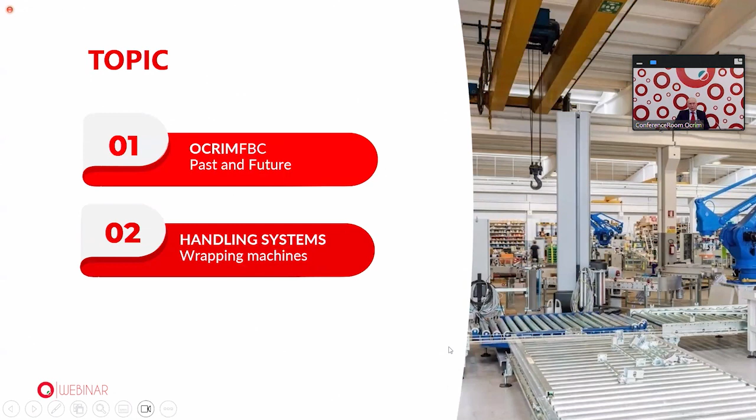We also had a similar webinar two years ago, so this is a continuation. Two years ago we had the webinar to introduce, or to present, the story, and I'll be back to the story in a second, just giving you the key highlights of what happened in OCRIM.

Today we will be focusing on the new products and the developments of the new machines. We will be talking about wrapping machines, or wrappers. So this is why the title of the meeting today is Wrapping the Future — what we will be doing in the future.

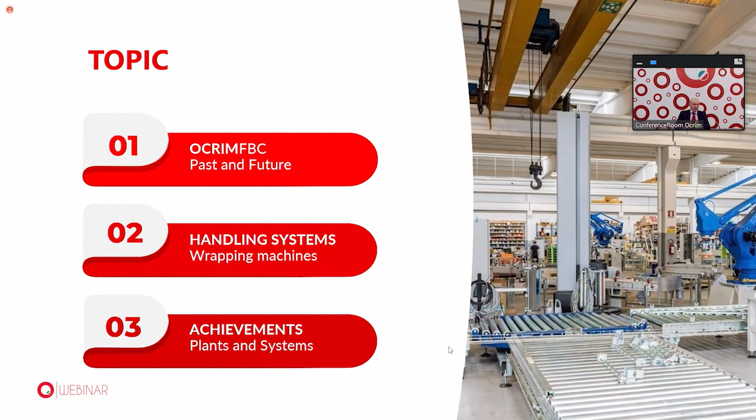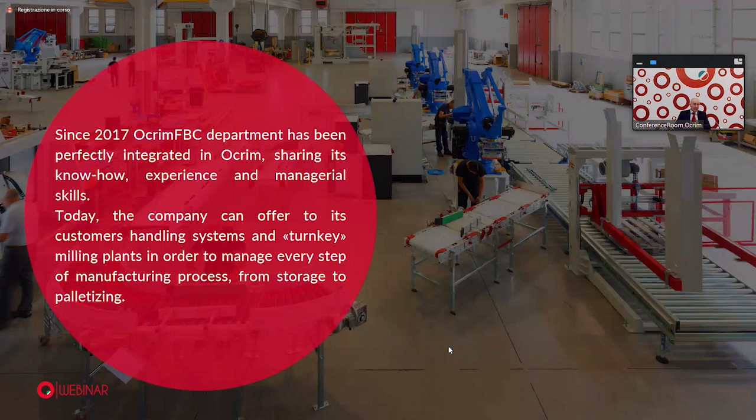A couple of words on the previous webinar and the handling systems, or end-of-the-line sector, in OCRIM. You know that we work in the milling industry, but back in 2017 we took over another organization, very close to our headquarters in our city, Cremona.

That company was in operation for many years. It was incorporated back in the 1980s, so 40 years of know-how and top technical skills.

Their customer package and installation base was a very big one in terms of the number of installations, more than 1,000, but also in terms of having global coverage of their business.

This know-how has been, if you will, imported into OCRIM, and it was integrated with the new technologies and new design systems that we have here.

So we have created a new format on the machines. Machines have been industrialized — they've been, let's say, modernized.

We have updated them with new applications, new components, new mechanical components, new logics, and in general new automation.

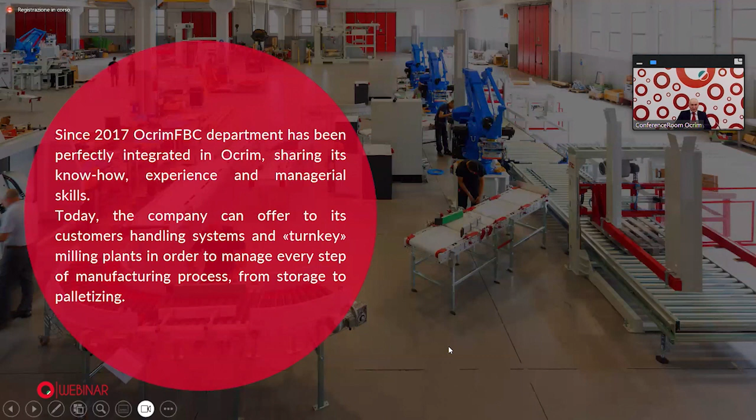Of course, the final product and also the services that we offer our customers have taken advantage of all of these steps forward. Now, OCRIM is in the milling industry, but at the same time we've been able, if you will, to do something very special.

We can now ship our machines to many different types of companies, not just the milling industry. So this is what handling systems do — basically they handle the so-called primary and secondary packaging.

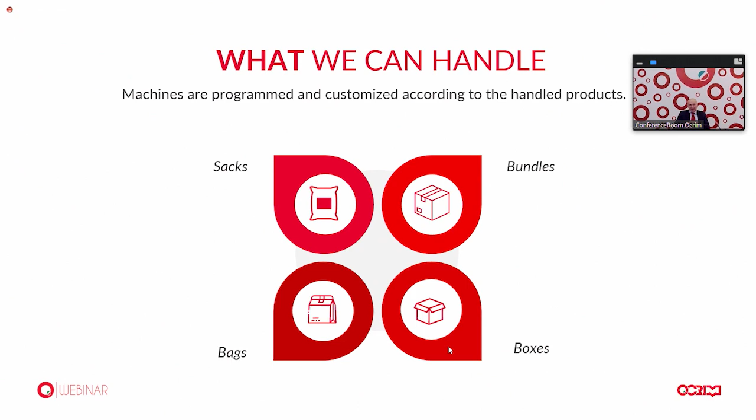The primary action means putting the product into the bag, the sack, the bundle, or the box. The secondary level means handling the sacks, the bundles, the boxes, or the bags. So this is one of the steps of the packaging systems, including wrapping.

So we not only put flour into a bag, so to say, but we also work in completely different sectors. In some cases they're very similar; in other cases they're completely different — for example salt, sugar.

Nutraceuticals, fertilizers, organic fertilizers, chemical fertilizers, cement, concrete, plastic materials.

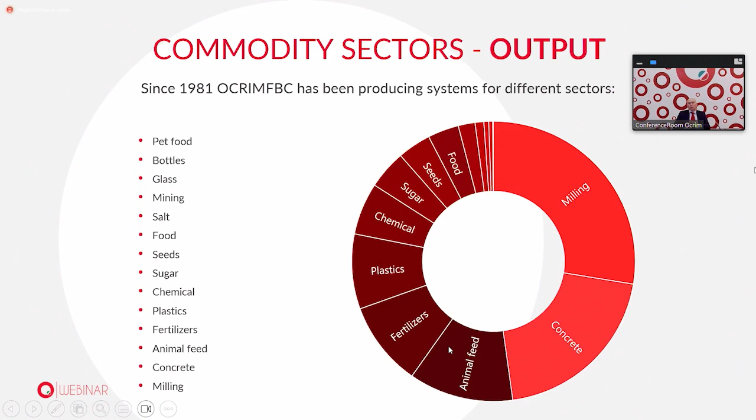Chemical products again. So basically, all in all, what can be packaged or put inside a bag or a box, or even a very general system — for example a bin, a tank, a bundle, or many types of containers.

So what is very special here in OCRIM is that we have become a global company.

Of course we export our machines in Europe, because this is the continent we belong to, but we are shipping our machines all over the world, in the five continents, with quite a large number of applications and installations.

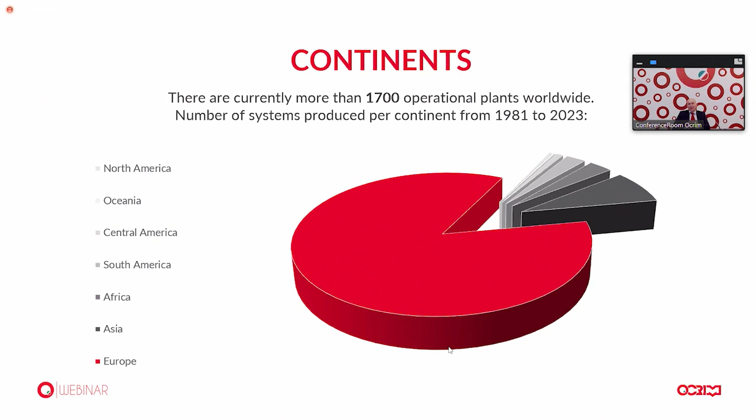As of today, OCRIM has installed 1,700 lines or machines around the world. This is why we are one of the biggest global players in terms of end-of-line handling systems, bagging systems, palletizers.

Wrappers, all of the lines or, let's say, transport systems. Of course we deal with, or we handle, pallets, both empty and full.

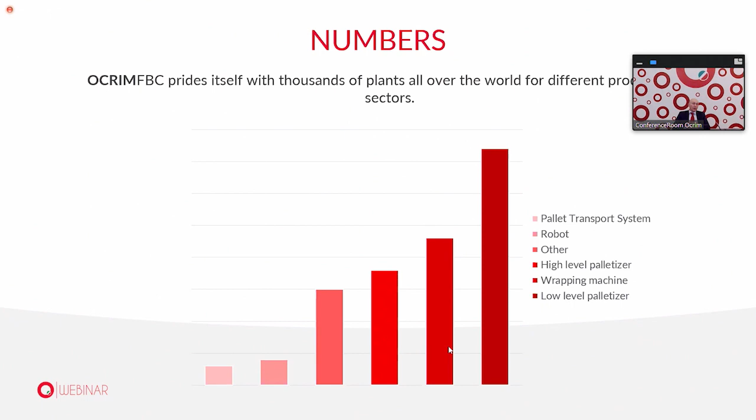As far as the palletizers are concerned, we have the traditional ones, which are basically mechanical. We also have the anthropomorphic robots, and another category, the so-called combined machines.

Anthropomorphic robots put to the service of the machine so as to guarantee all the benefits from every single machine. Together they are able to generate further positive aspects.

For example, a much better or higher flexibility, installation, easy configuration.

Considering different types of layouts and or plans. In many cases there's not enough room or space, so of course we create unique systems.

There may be pillars, there may be other machines around our line. So once again, our machines are very flexible, really unique, and custom made.

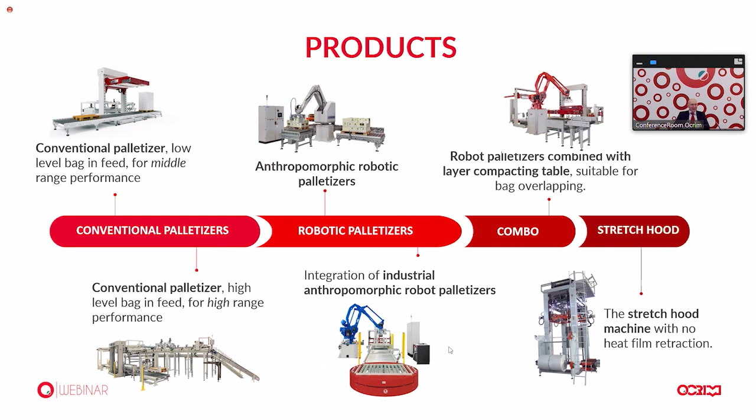Okay, we don't have much time today, so we have so many things to do, but I don't want to lose control of my flow of speech.

Back to our products, we have conventional palletizers. In this case, you have two different types of loading or feeding, from the top or from the bottom. The first line is up to 700, maybe 800 bags per hour. Then we have a second type of machine, from 800 up to 2,500 bags or sacks an hour. This means we can cover a production range which is typically what the market wants in this industry, as I specified before.

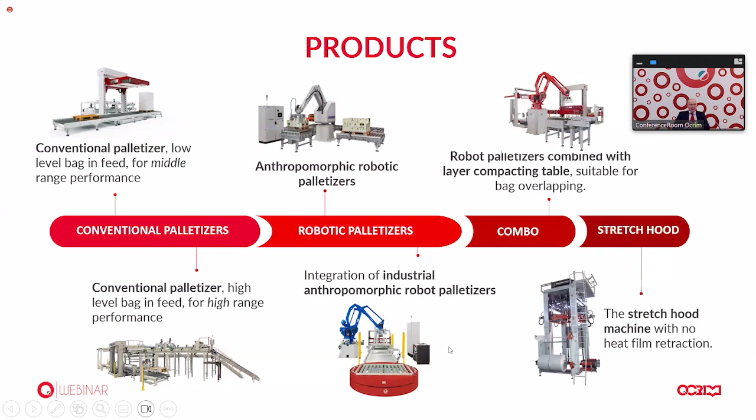Now, this kind of classification describes exactly the topic today. So the AV555, this is the wrapper that we have recently introduced. AV555, that you can see in this slide, is the fruit of our design. By the way, this is the rotating arm wrapper, okay?

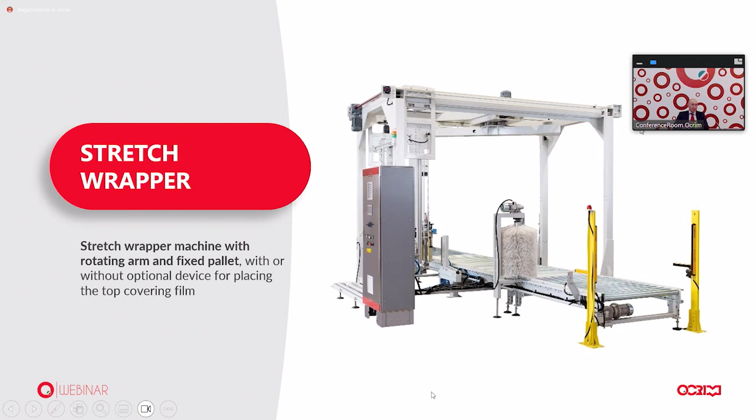As you can see, this is the model where the pallet gets onto the conveyor. There's a rotating arm turning around the pallet, applying the stretch plastic film. We have plenty of options here. The main option, if you will, is the top device. This is basically an arm that puts a sheet or a film of plastics on top of the pallet. And this is exactly AV555.

In this case, the table is rotating, the arm is fixed. I mean, the only movement we have is up and down, the vertical movement. But in this case, the pallet rotates in order to be wrapped. So again,

AV555, if you will, is an evolution of the previous product. This is not replacing the previous one. In the past, we had the AV500. And what was special is that it was a simple, easy machine, one of the best performers, with the traditional film application or wrapping. Today, the market has changed.

What we need is the pre-stretch machine. Pre-stretch means that our machines can save you a lot of plastic material. Thanks to the green philosophy we all want to stick to today, it's very important to consider this trend. So we decided not to waste time, and we have created a model which is really unique on the market.

AV555 doesn't require you to replace gears or pulleys to change the pre-stretch ratio based on the features that you want to use, or even the levels of pre-stretching that you want. In this very case, with AV555, we have equipped the machine with two motors. The two motors work independently. So once again, they can be programmed, set up, and controlled individually.

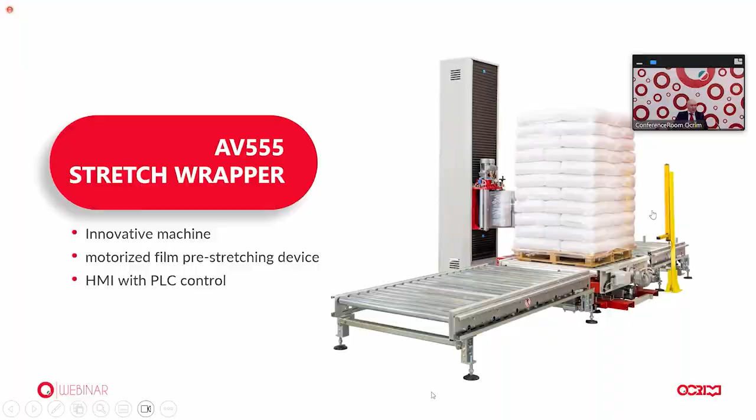Now, to make sure you understand exactly what I'm talking about, we have prepared this video. This is one of our recent machines, and this is what happens soon after the palletizer.

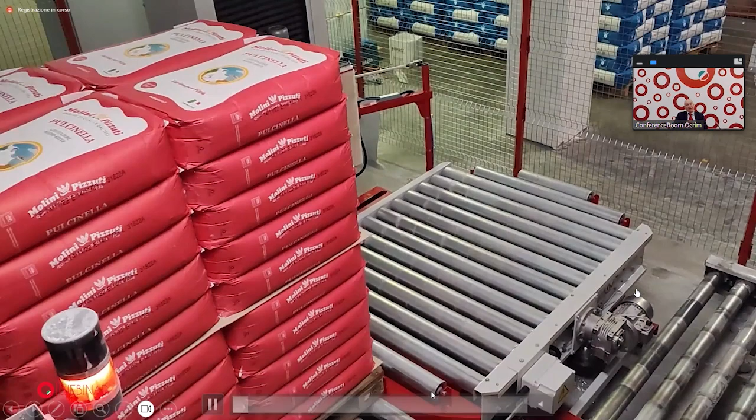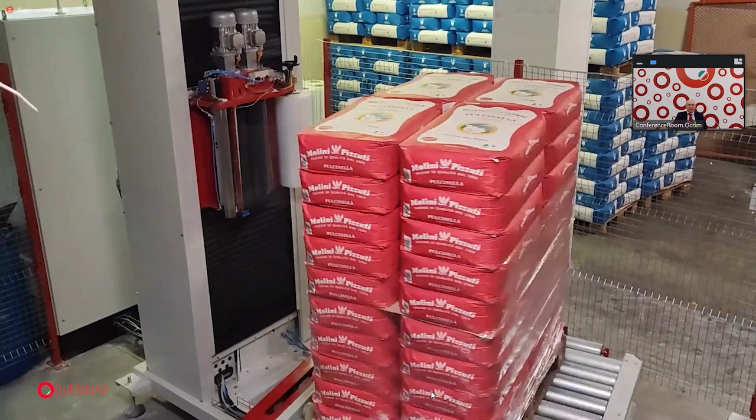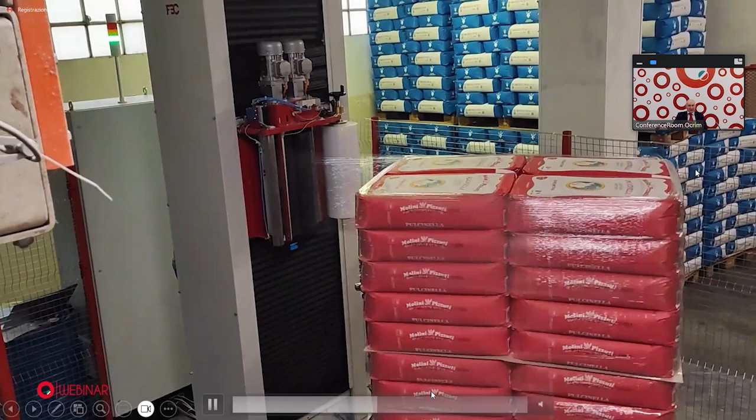You can see here the pallet gets into the wrapping machine, and here's the wrapping cycle. I'm speeding up the cycle to save you time, but this is what you really have to focus on: the pallet is very stable. The wrapping cycle on average takes 1 minute 45 seconds up to 2 minutes, so production is between 30 to 35 pallets an hour.

It is also possible to select how many revolutions you want around the pallet, whether on the bottom, in the middle, or all the way up to the top. From the operator dashboard, in a very easy way, you can also change the frequency of the up and down vertical movement, so you can basically control the speed.

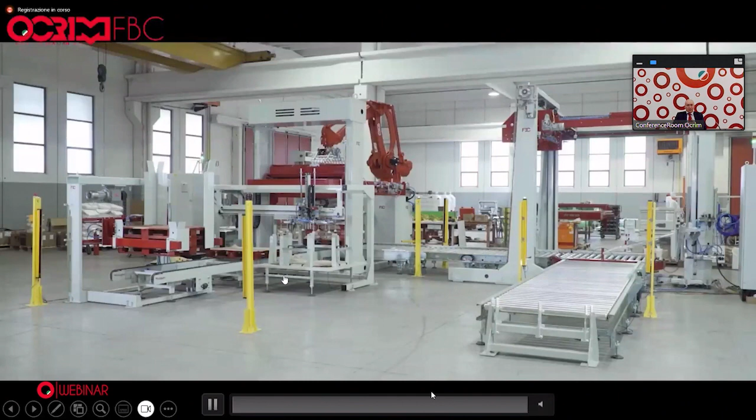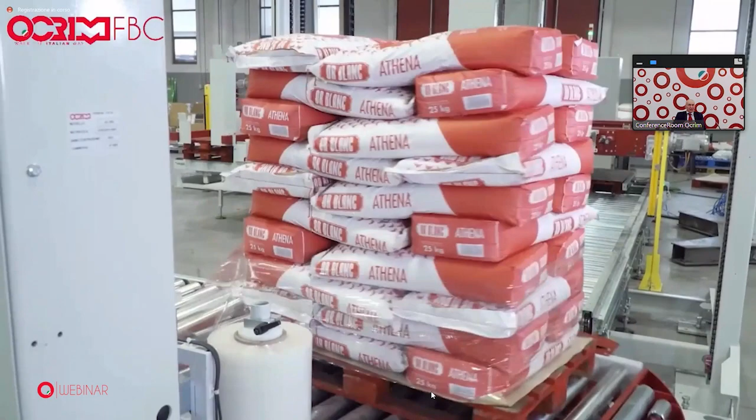This is a different video we have prepared just to make sure you understand that the pallet comes from another machine and gets into the wrapper. This is the AV500 model with no pre-stretch, but the basic operation is the same: the pallet rotates on the bottom while being wrapped.

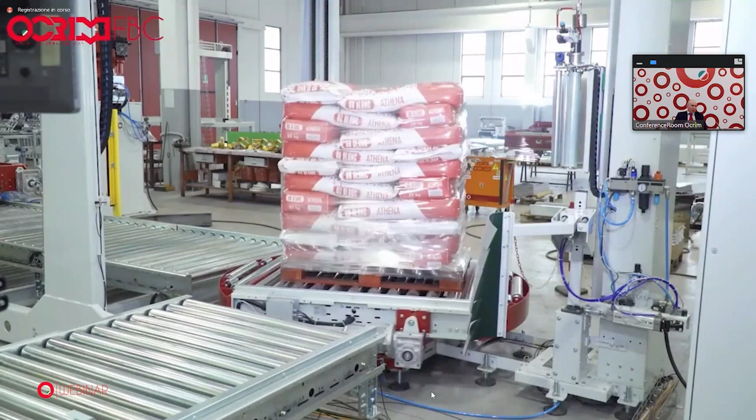Why do we have to wrap pallets? Well, this is one of the key needs of the market, especially in the milling industry. If you want to store your bags in racks, or in an indoor storage area, or even outdoor storage facilities, more and more customers want to make sure their pallets are protected against powder, dust, humidity, or water.

So in this case, you can see that we put another final sheet or film on the top of the pallet, this sort of roof, and then once again we continue with the wrapping. This is absolutely waterproof protection.

The second reason why customers want wrappers is to ensure stability of the load. For example, if you have sacks or bags, or when the filling level is not exceptional, with no wrapping you wouldn't be sure about the stability of the layers. So you may have damages, and it may be difficult to load half a pallet onto your truck.

So once again, this is now ready to be loaded on a truck, and then you can drive for thousands of kilometers or miles. When you reach the customer's premises, the pallet conditions won't have changed, so there will be no damage.

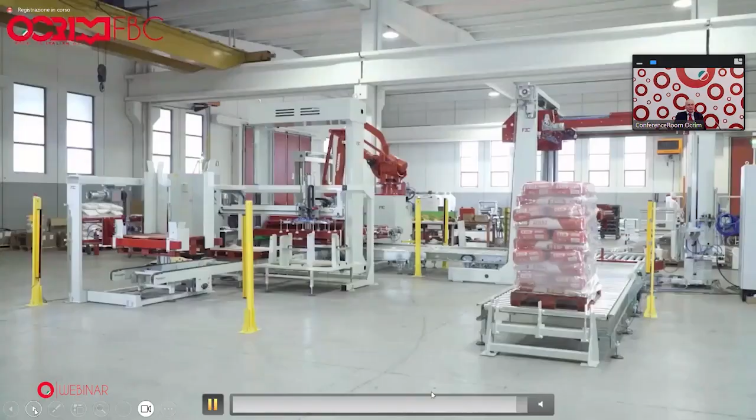We also have other options or accessories you can install on the machine. Let me take advantage of having you here: we have the new Meti Top. This is basically a side arm that replaces the previous model you've seen before in the video. This new model is smaller, so the footprint is smaller.

It is modular, meaning in terms of positioning you can work either on the right or on the left. This can come with the wrapper, but also with many other machines, for example the palletizers.

You can also put a layer of plastic, a film, on every single layer. We have already made hundreds of these machines, which is now very successful, both the Meti Top for the top cover plastic film, and also to include film between the different layers.

Now, we pinch and pick up the film mechanically, then we take it up to the cutting level. Then we have a blade, a very simple cutter, so this is very cheap. This is not very demanding in terms of finding spare parts, so it's a very ordinary mechanical component.

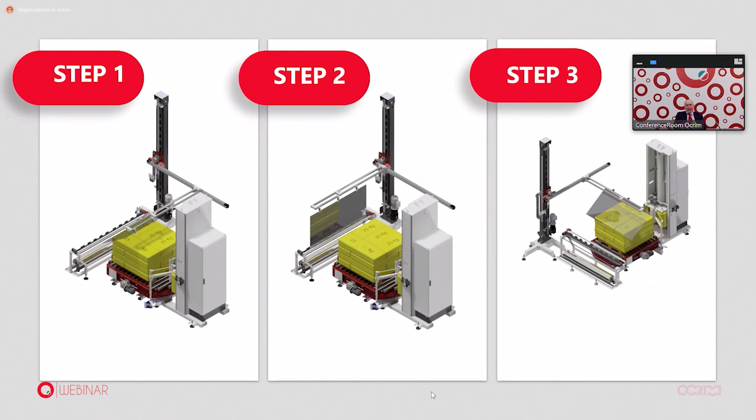It depends on the pallet type, Euro pallet or APAL, 80, 120, 100, 120. You can set a specific operating profile considering every single type of pallet, so the operator doesn't have to change anything for every single pallet. So once again, the changeover time is basically zero, saving plenty of time during setup.

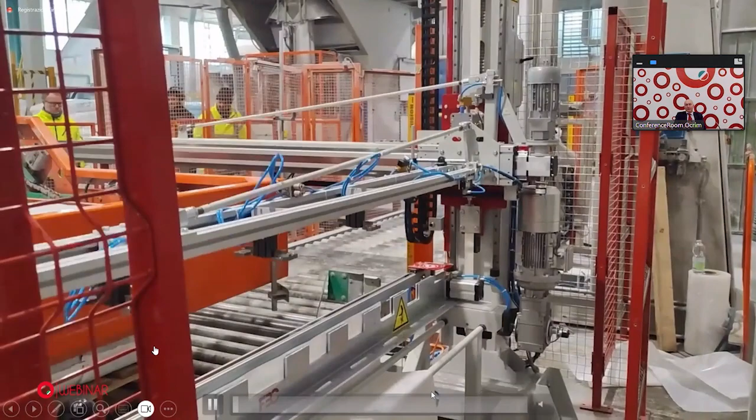This is the new Meti Top, for the top layer. It comes with a palletizer, but the operating principle doesn't change. So we take the film, lift it up, and this is the final phase: we put the plastic sheet on the top of the pallet. You can also put a film on top of every single layer.

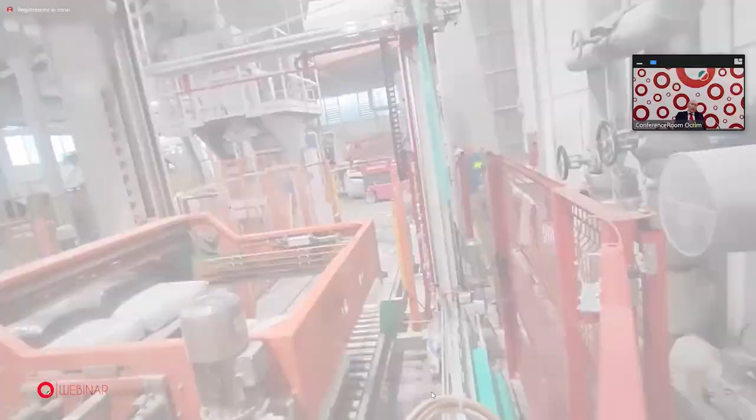This is a traditional or conventional palletizer that I have explained before. Based on how many films or sheets we want to put, you just have to dial the number of sheets and the level, so the height. The machine is absolutely very flexible.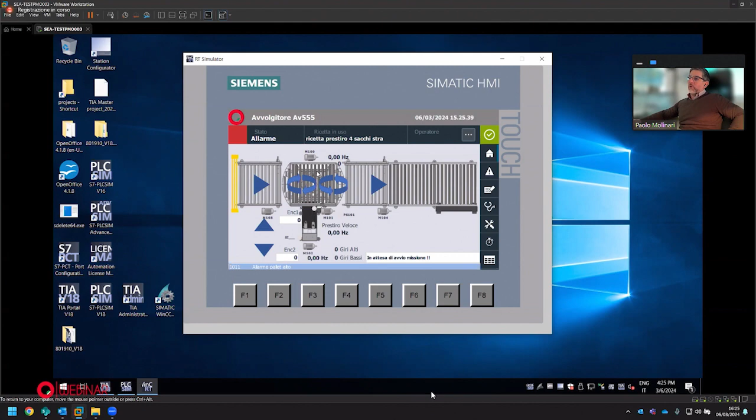So once again, it depends on your wish and your needs. You can tap on the two arrows, you can click onto the carousel, so clockwise or anti-clockwise, for example for maintenance operations. And you can also move the unit up and down, so vertical position. In this case, you have the general layout of the machine.

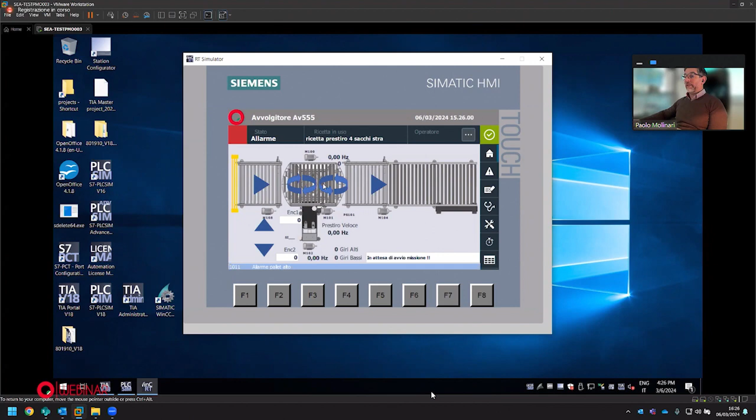You have the possibility to, once again, manually work on the system. We also have an alarm page. This is a summary of the alarms that we have on the machine. This means we have the right diagnostics, and if you want, you can implement corrective actions because of some trouble or malfunctioning.

This may be due, if you will, to grease on a photo cell or maybe a film that's broken. So on this page, you can see all of the reports and all of the alarms. You can also see here possible third-party systems so that you can really take into account all the alarms, and this means that you can see them in a so-called centralized maintenance system. You can also have the alarm reset button.

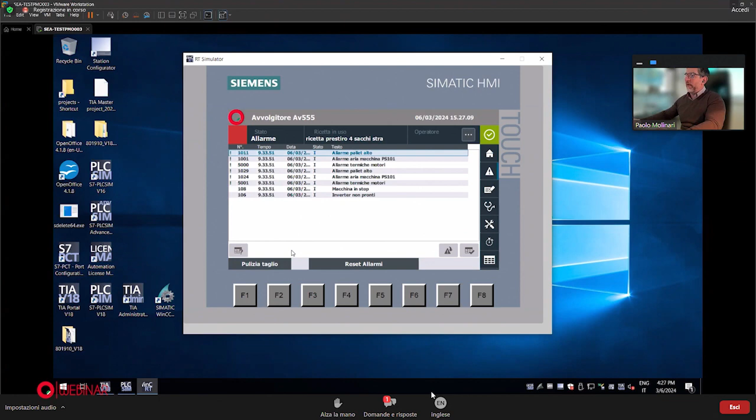You also have another button in order to clean the film cutting tool or cutter. There may be some plastic residues on the cutter or the blade. You can launch a self-cleaning cycle so that we can clean the plastic film cutter.

This page is really very important because thanks to this page, what you can do is set up a specific recipe. For example, you may want to decide whether or not the wrapper has to work automatically, depending on all the automation cycles, and then manually, you can activate it by clicking on the arrows as you've seen before. It is also possible to enable this kind of function.

Now, with this function, the height of the film is reduced thanks to a specific tool that you can find on the wrapper, so that you can basically crease the film while the wrapper is wrapping the pallet from the bottom up. This means that you can better structure and even strengthen or reinforce the wrapping cycle of the bags that you can find in the pallet.

You can also have the so-called complete film reduction. This means that basically you can see the creases when the arm goes up, but also when the arm goes down, wrapping the entire pallet.

It is also possible to set up a process that at the end of the wrapping cycle will be able to label the pallets. So once again, there's basically a printer with a labeling unit, and in this case, we create specific labels that can be put on the pallet.

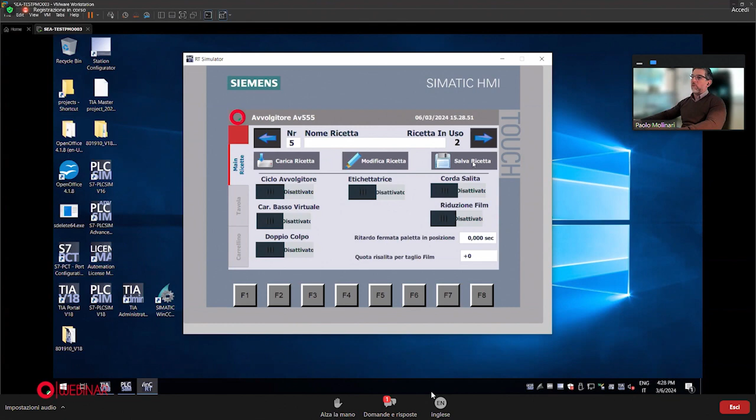It is also possible to load, or in this case, I should say, upload recipes. You can create new recipes. You can save all of them. And this is something that we will find inside the program. You also have some specific menus allowing you to have fine-tuning of the machine so that you can adjust the machine based on the size of the bags or the sacks or the bundles.

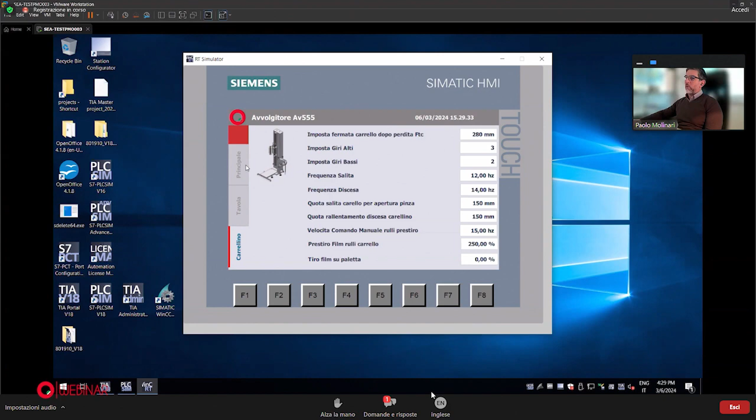Now, this is a user menu, and this can also be used with the help of one of our remote engineers in case you need adjustments and or fine-tuning of the machine. Once again, we need to pay attention and be careful with the pre-stretch function. This is the key feature of the wrapper. This means that the film is absolutely applied correctly onto the bags or sacks or bundles on the pallet.

Now, let me take you quickly onto this page for a short focus on the performances of the machine. So in this page, you can see all the performances. Now, performances can also be zero set or cancelled. You can see here the number of cycles or revolutions of the machine. You can also see the wrapping speed. You can also see how many meters of film have been used. So in general, all of the performances carried out by the wrapper.

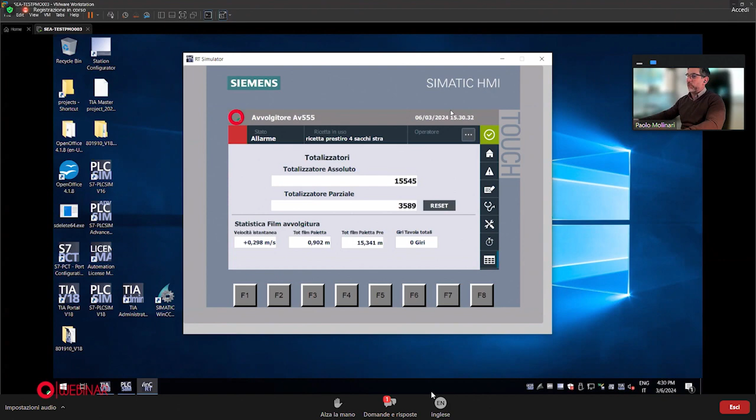Now, all of this data, thanks to a third-party data collection system, can be sent to the central system in order to generate a report. So once again, this is it with my part of the presentation.

Okay, thank you. Thank you so much. Okay, Paolo, thank you so much.

We can also say that on the interactive panel, we can also upload all the documentation of the machine: electric diagrams, instruction manuals, and spare parts catalog. This means that the consultation of this documentation is very easy for readers or operators.

Paolo and Roberto, thank you both so much. May I ask you a couple of questions that we have collected? The first question is, what about retrofitting my handling system? How long do I have to wait for the design, production, and installation of the option?

Now, if you already have a machine, this is very quick because we just have to connect it to the existing palletizing system. So of course, we have to identify and study the layout of the machine, and we do the setup of the machine, we do the configuration, and then maybe straight or 90 degrees, but more or less, it takes 10 days to do the complete installation of the machine. Oh, that's very quick. It is, yes.

Great. I have another question. This machine, do you require a specific quality of plastics, or can you also use different types of plastic without stopping the machine? Now, as for the wrapper that we have presented today, with the pre-stretch system, of course, we need to use a specific plastic film, and this is something that's required for pre-stretch machines.